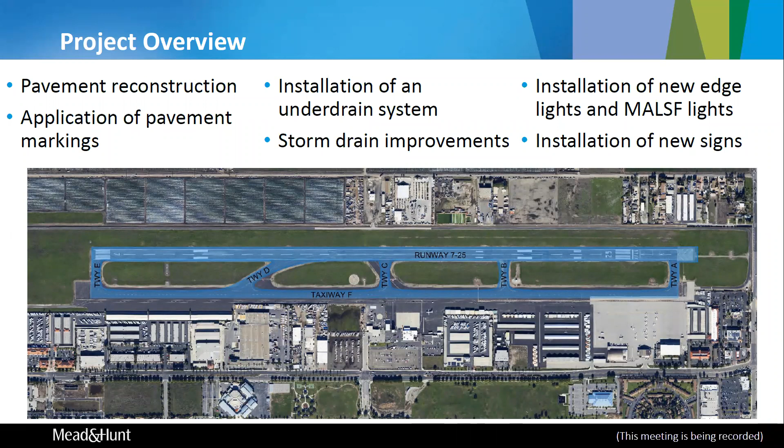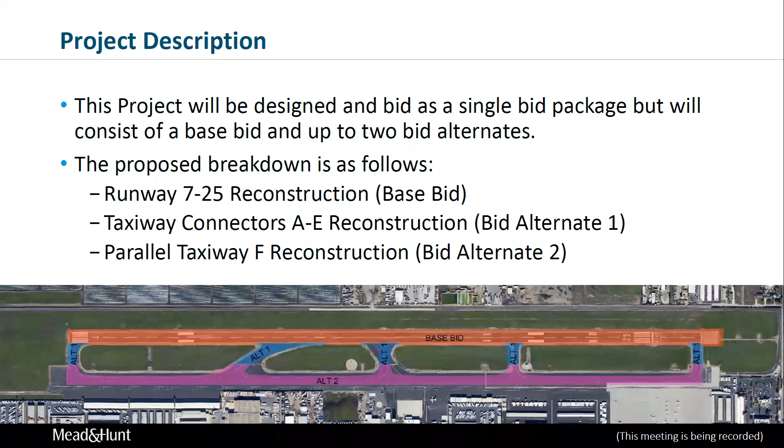As far as the project description, the project is designed and bid as a single bid package that will consist of a base bid and up to 2 bid alternates. The breakdown is as follows: the runway 7-25 reconstruction is in the base bid, taxiway connectors Alpha, Bravo, Charlie, Delta, and Echo reconstruction will be in bid alternate 1, and the parallel taxiway Foxtrot reconstruction will be in bid alternate 2. The project would be funded with a combination of County of Ventura funds, along with an AIP grant from the Federal Aviation Administration. Next slide.

This project would entail proposed airfield changes, and these really are in regards to the taxiways. What's shown in blue in this diagram on the taxiways is what would be modified. The high-speed connectors are being modified slightly, and what is now taxiway Bravo is being shifted a little bit to the west. The high-speed taxiway is going to remain in place; it's just going to be narrowed down a little bit. And the taxiway names, again, these are proposals, would be changed from what's now Alpha, Bravo, Charlie, Delta, Echo, and Foxtrot.

Under the FAA's current design standards, if you have a single runway with a single parallel taxiway, the connector taxiways are changed from an alpha character like Alpha through Echo to an alphanumeric designation. In other words, Alpha would go to Alpha 1, and then Alpha 2, Alpha 3, Alpha 4, and Alpha 5. And the parallel taxiway would go from taxiway Foxtrot to taxiway Alpha.

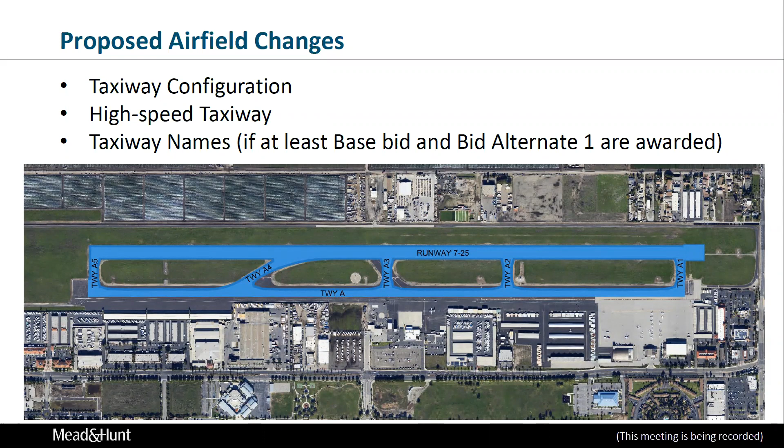As a note, though, these changes will only occur if bid alternate 1 is completed as part of the project. If the project only has enough funding to complete the base bid, which is the reconstruction of runway 7-25, then these proposed changes would not occur at this time. They would happen at a later date. Next slide, please.

So here's from the tenant workshop number 1. We had one question as far as a survey, and that question was, what is more important to you? And it was either expedited construction duration, which means close the pavements down and reconstruct them and then open them back up, and that would be the shortest construction duration.

And then the second option was, is limited runway availability more important to you? So that means during the reconstruction of runway 7-25, albeit not full length, it would be available at a shorter length. And as we showed, and Jeanette will go into this, we would have either 2,100 up to about 2,500 feet available for takeoffs and landings.

So the results are, we had approximately 42 people submit on this survey, and 20 responded for expedited construction, and 22 replied for limited runway availability. So based on the previous survey, we really narrowed down the design focus on these 2 alternates.

However, the county is still committed to hearing you as the tenants, and after the workshop, we would begin working on what's called the Construction Safety Phasing Plan, or CSPP, which shows the ultimate phasing of the project, and then that is submitted to the FAA for their review and approval. Next slide.

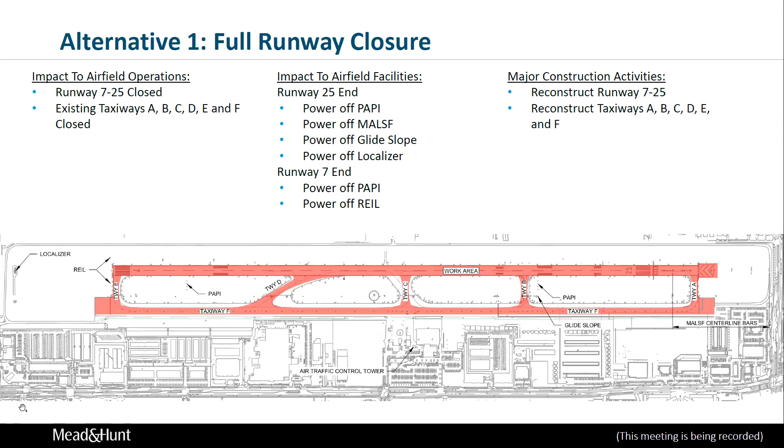So if we go to the next slide, an analysis was done on each of the alternatives, considering the safety, the schedule, the budget, and the product quality. The table here summarizes the evaluation analysis and scoring for the full runway closure phasing alternative. Scoring is provided on a scale from 0 to 10, and a score of 10 indicates an ideal scenario, and a score of 0 indicates an unacceptable scenario and eliminates the alternative from consideration.

So if we go through each of the evaluation criteria, safety has a score of 9. In this scenario, there will be increased operations at nearby airports, and aircraft operations on runway 7-25 will be prohibited during construction. For construction duration schedule, it will be approximately 3 to 4 months plus the night closures. And this alternative provides the most cost-effective construction operations, scoring 10 points.

Since continuous concurrent operations will be allowed for the duration of the work, there will be no transverse asphalt pavement joints in the surface course. What this means is that since the whole parallel taxiway or runway will be closed, the asphalt train will be able to do one continuous pull from one end of the runway or taxiway to the other end. So it will be a smoother surface. And this also results in a score of 10 points.

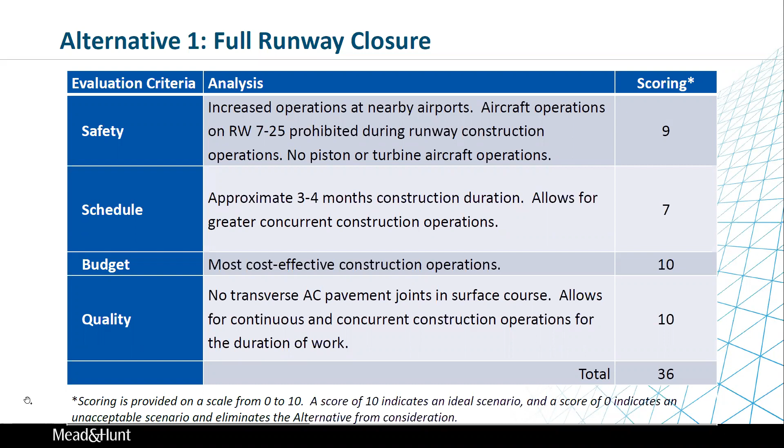So if we go to the next slide, we can see alternative 2, which looks at having partial runway availability during construction. In this alternative, it will be a two-phase construction. Basically, the runway will be split in half, more or less. In this slide, you can see that for one phase, there will be construction on the west end. So taxiway Delta and Echo will be constructed together with the runway and taxiway portion west of taxiway Charlie.

And the runway 25 displaced threshold will be kept at the same location. So this results in the runway length on the east side of approximately 2,500. And so this allows for a 400-foot clearance for safety between construction equipment and aircraft on approach. So in this configuration, most turboprops should be able to operate on this runway, and there will be no touch and goes allowed during construction if this phase is selected.

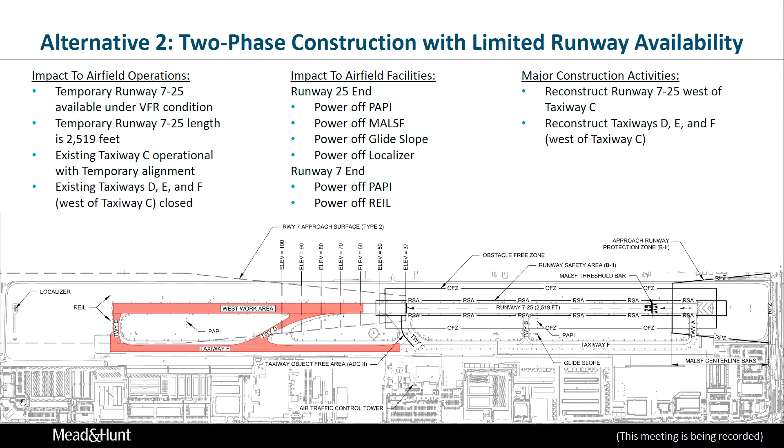So this also assumes VFR conditions and no runway lights or NAVAIDs will be on. Otherwise, if we do this, this will add complexities such as the flight checks, increased duration, and reduced length to meet spacing. So as you can see in this alternative 2, in this slide, here we'll be doing the construction on the west half of the runway and west half of taxiway Foxtrot, as well as the construction of taxiway connectors Alpha, Bravo, and Charlie. I meant to say we'll be doing the construction in the east portion in this phase.

So basically, the same 400-foot clearance will be maintained between construction equipment and aircraft on approach. And this results in a runway length of a little bit over 2,100 feet. And so basically the runway 25 threshold will be based on the taxiway Charlie axis. So there's a potential that if back taxi conditions are allowed during the east runway configuration, we can increase the west side of the runway length so that we have a more even split on the runway length for both of the phasings.

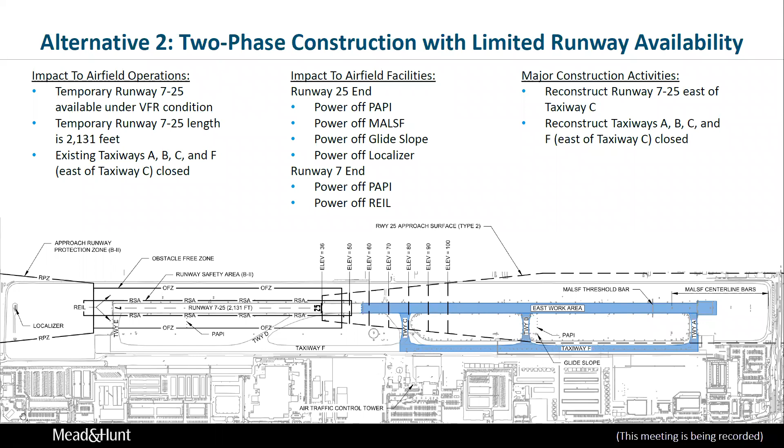So alternative 2 will last approximately 5 to 5.5 months for the main work element and include up to 1 to 2 weeks full runway closures plus the 2 weeks of night closure to do runway grooving and the pavement markings. So we go to the next slide. So the same evaluation criteria and scoring was used for alternative 2 as in alternative 1.

So the impacts to safety in this configuration include that a shortened runway will be available for small aircraft and the runway will be reconfigured and there will be aircraft operations over the construction. As mentioned before, there will be no NAVAIDs, PAPIs, or runway lights. Aircraft will be operating under VFR conditions because otherwise, if we don't do the VFR conditions, it will add more complexity such as the flight checks, reduced runway length to meet the spacing and increased duration. So this is scored a 4 for the safety feature.

And so also the reduced runway length coupled with the aircraft operations over construction operations will be well vetted through a safety risk management process, mitigating the safety risk to an acceptable magnitude and likelihood by the FAA. So basically, if alternative 2 is selected, we'll have to go through FAA. It's a process, a meeting where we go through all the safety and all the construction scenarios for this alternative, and FAA has to approve this alternative. This process, as a note, can take months. If we go to the next slide.

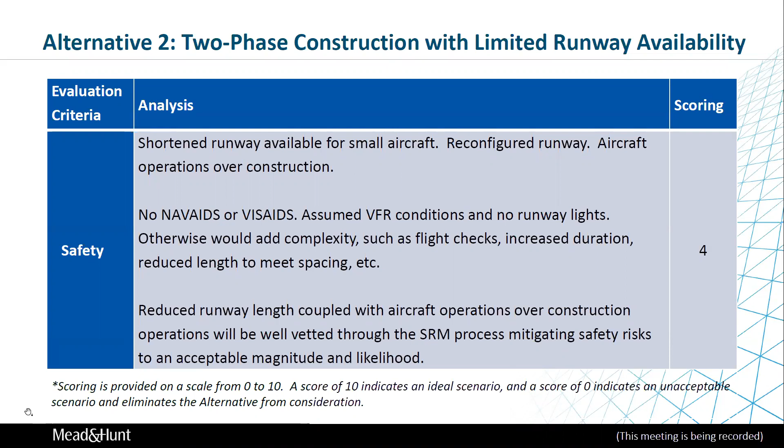So this alternative will add two runway reconfiguration operations. Therefore, the runway will have to be striped 3 times. So first, the existing marking will have to be removed. Then the first temporary runway will have to be striped. And then followed by the second temporary runway will have to be marked. And then paint from the new temporary runway will have to be removed to paint the final runway markings. So when pavement markings are removed, they're usually done by water blasting. So this could damage the pavement once this process is done.

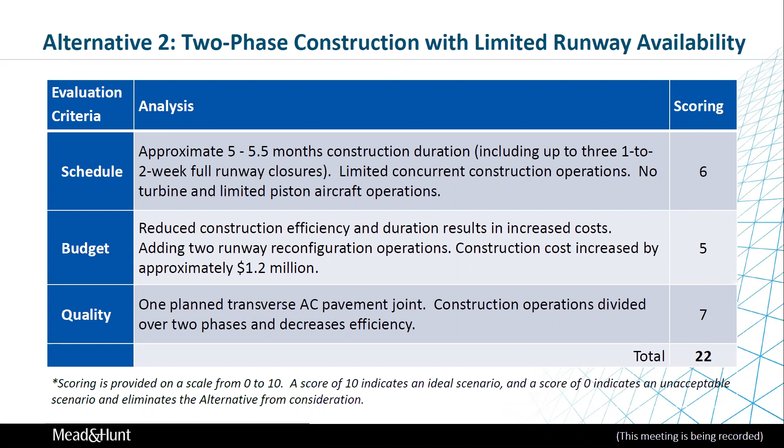So construction is expected to occur in the summer and fall of 2021, but this is subject to FAA funding. And award of the base bid, the alternate 1, which is the connectors, and alternate 2, the parallel taxiway, is also subject to FAA funding. So the ideal scenario will be to build at least the runway and the connectors so that we don't have to close the runway at a future date. So as mentioned in the previous slide, alternative 2 increases construction cost by approximately 1.2 million, which is about 30% of the cost to construct the taxiway connectors.

And also alternative 2 will require a safety risk management process because the shorter runway will have to be approved by FAA. And these might impact the timing, start of the construction, and the funding. So now Ariano Associates will explain to you how you can participate in a survey and provide feedback to us.

Good afternoon, everybody. Yes, I'm going to launch the poll now. And as we have mentioned earlier, the public participation portion is very important to this process. And we have 3 questions for you to participate in the poll today. So I'm going to launch that now. And we'll leave the poll open for a couple minutes, but just to quickly go over some of the questions.